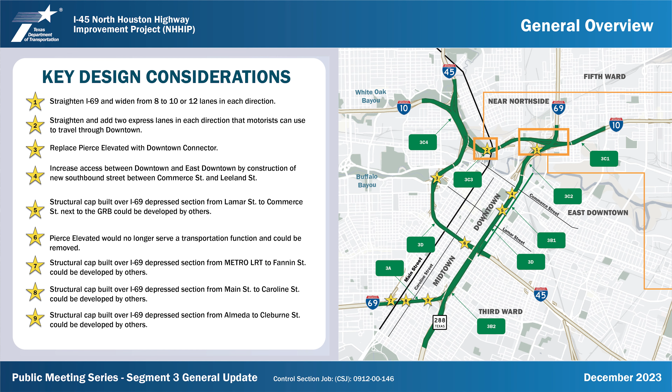So let's talk about construction, phasing, and the implementation, especially around downtown in segment 3. Project 3A begins at Spur 527 into SH 288. The elevated section today will now be taken and be depressed below ground. That project is slated to start in summer of 2026, and it's around a $600 million project.

Segment 3B1, so 3B has two components. 3B1 is first the drainage component of St. Emanuel along McIlhenny to Buffalo Bayou. That project is actually the first one that will be implemented, and we'll talk more about it in the segment 3B session. Segment 3B2 will be the interchange then with I-69, SH 288, and I-45. That project is slated to start in March of 2025.

Then we have the components of 3C1 through 3C4, which run along I-10. 3C1 beginning on the east side from Gregg Street to Waco Street. We hope to put that out into construction in 2027, and that is a reconstruction and widening of that existing facility. 3C2 will be the large interchange with I-69, I-45, I-10. We look to go out to a design build contract again in 2027 with that interchange.

3C3 will be from White Oak Bayou to McKee Street. That's the realignment of I-10 through and around the U of H downtown facility. And that project is about $250 million, and we believe we could accelerate that piece into summer 2026.

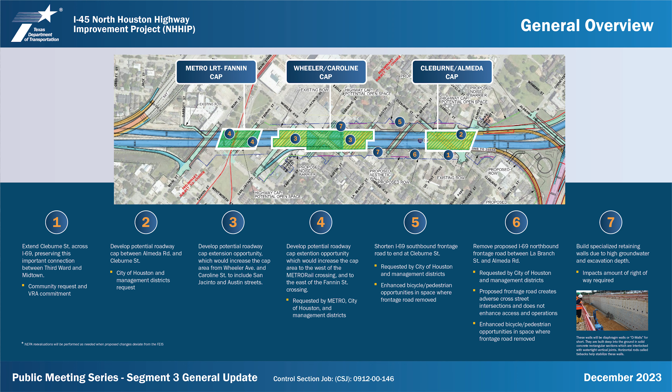And then the seventh design change in segment 3A relates to the specialized walls. We have a high groundwater table, and so as we go depressed, we actually have to use a unique retaining wall design that is a diaphragm type wall that's buried in the ground and sealed off then from the groundwater. This will be the first application in this area of this wall type, and as we get further in final design, there are potential areas of additional increased right-of-way.

I talked about working with Metro, so I want to go a little bit more into what we've been doing there at the Wheeler Transit Center. So with the facility change of the highway, instead of going over the transit, going under, we are now going to reconstruct the Wheeler Transit Center, and we're also going to add a third track to the components of the LRT, which helps us then keep those operations going during construction and better address the community's needs and lessen the impacts of the construction activities.

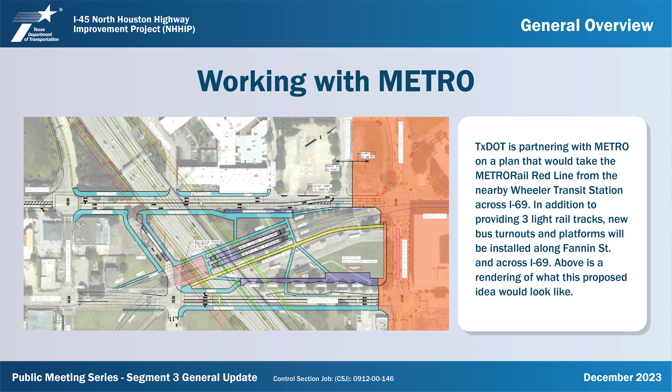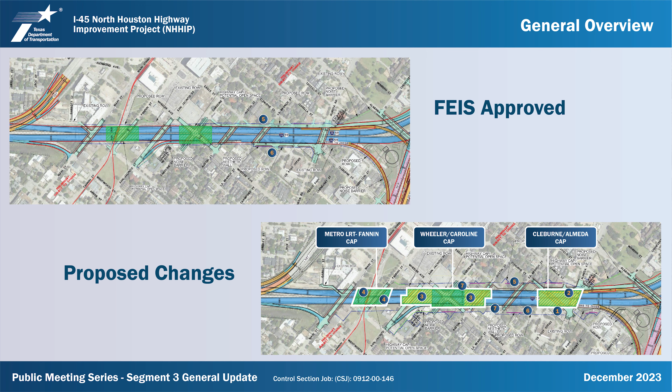So we've talked about caps. What is a cap? Segment 3A actually has 3 of the 5 potential caps in the NHHIP. And a cap basically is, as we go from elevated to now depressed, we not only connect the roadway that brings the community together from one side to the other, we have the opportunity to increase the concrete surface and space that gives us a larger area that can be repurposed for many different community needs. That's what we get into and call the art of the possible.

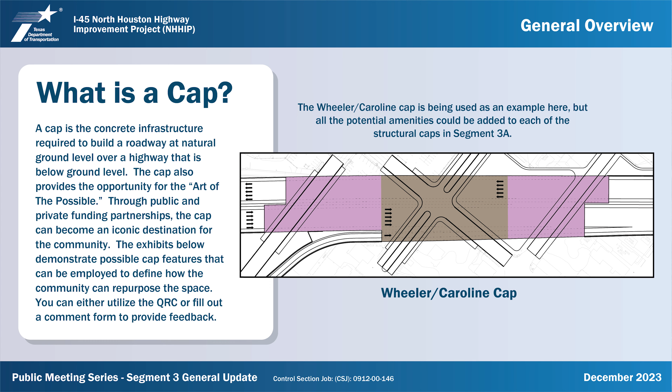So once these caps are in place, there's great opportunity then for what they could be, what we could put on top: places for children to play, places for you to recreate, places for you and your pets to get exercise, places to come and have theater and art events for the community.

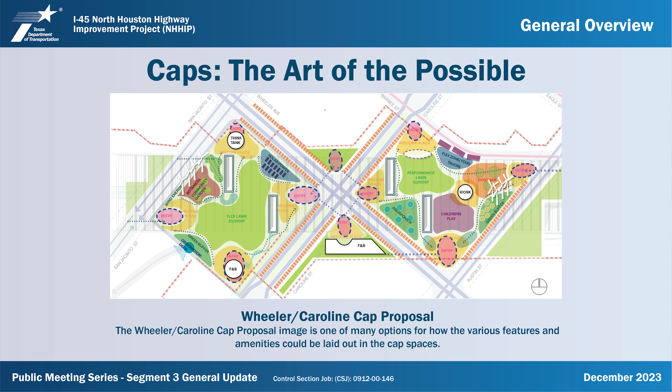So at this point, what we would like you to actually do is give us some feedback. As we work with the management districts and the city, we'd like you to take a survey. You can either put your mobile device over the QR code that's on the screen, or you can look on the taskbar of the Zoom to the Art of the Possible link, and then take this survey and give us some feedback.

Segment 3C3. Proposed design changes in the corridor along I-10 that we call Segment 3C, made up of 4 projects. Specifically, as you look to the west side, Segment 3C3 and 3C4. We have the work where we realign I-10, as we said, in the U of H downtown campus area. Working with U of H downtown, working with the city, we actually have some great opportunities to improve the design.

First and foremost, extending North San Jacinto Street up to meet Providence and Rothwell, which serve as frontage roads along I-10. So that increases that downtown access. The other thing is, between that point where we bring San Jacinto up, now taking Naylor Street, making it 2-way between San Jacinto, Main Street, and the access to the U of H downtown campus. That really helps us with the entire street grid network that'll be underneath the elevated freeways in that area.

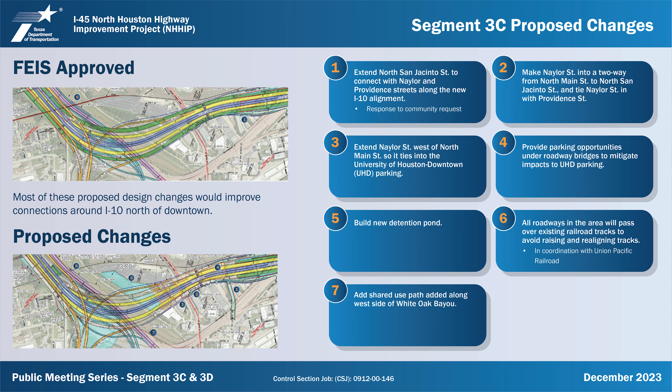Toward the east side of the project along I-10, the eighth design change that we've looked at specifically in response to stakeholders and feedback during the FEIS period was to add a Gregg Street exit. So from IH-10 now, we will be able to exit directly to Gregg Street. The ninth change on the other side of I-10 is to take the frontage road that previously stopped at Meadows and then picked back up at Jensen and make a continuous connection past I-69.

And then Nance Street in the FEIS was proposed to end as the interchange and the new Rothwell alignment came up to Jensen. As our 10th proposed design change, we're actually going to take Nance Street and extend it and connect it to Rothwell to again increase the flexibility and the connectivity between that area and Jensen and Rothwell.

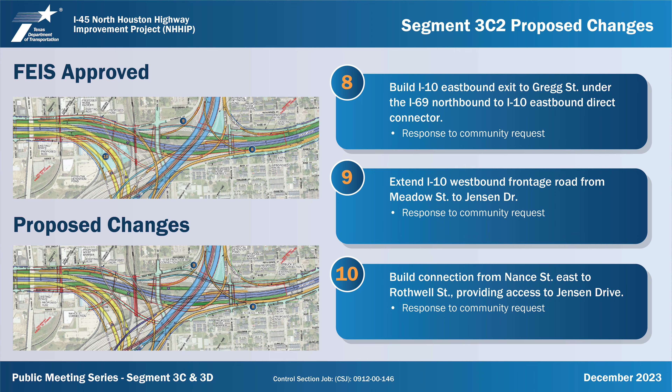And the other thing that we've looked specifically at, TxDOT has a commitment as they get into final design to look at reductions in the footprint where feasible. As we've looked at 3C and that area along I-10, specifically west of I-69, we've identified the opportunity along that piece of I-10 to reduce the right-of-way. We can reduce and eliminate the right-of-way in several parcels along I-10 west of I-69. That actually reduces the number of residences potentially relocated or impacted.

We've also identified some isolated areas along I-10 where we can similarly do reductions of right-of-way, or at the downtown connectors where realignment and connectivity into downtown enables us also to reduce right-of-way and potential impacts.

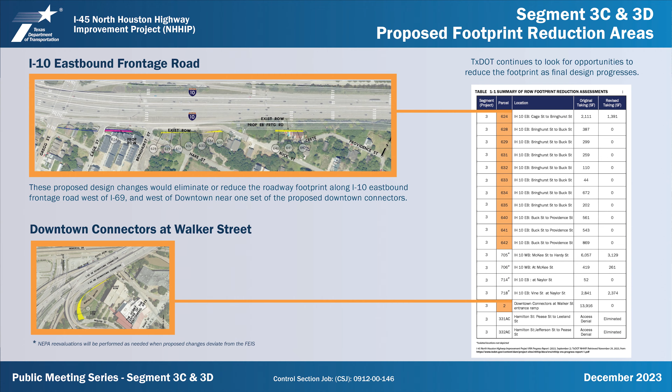And then 3D1, as I said before, 3D1 will actually be the piece where we depress I-69 and I-45 down behind the George R. Brown Convention Center, Minute Maid Park, and the soccer stadium. We give a real opportunity now for an entertainment space that connects all of those areas in the EaDo community and downtown community.

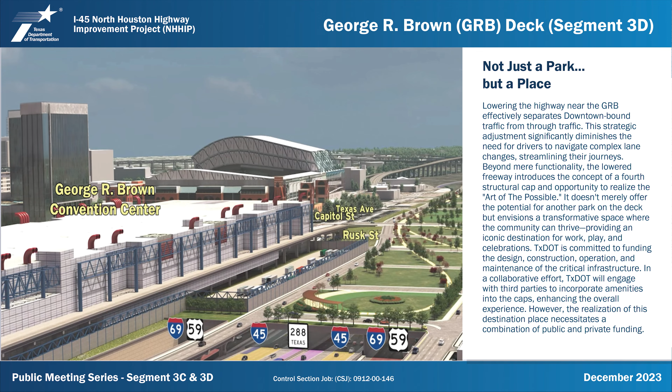As a part of all of these improvements, I want to talk about the drainage improvements. So with NHHIP now, we're going to be able to actually reduce the floodplain along Buffalo Bayou that goes through downtown. We're able to reduce structures that currently get flooded today, and we're also participating directly with our partners, Harris County Flood Control District, City of Houston, in the North Canal projects. TxDOT has put $20 million into the city's North Canal project, which is a bypass to reduce the flood levels along Buffalo Bayou. And then the South Canal component of that, TxDOT will construct as part of NHHIP in our Project 3C2.

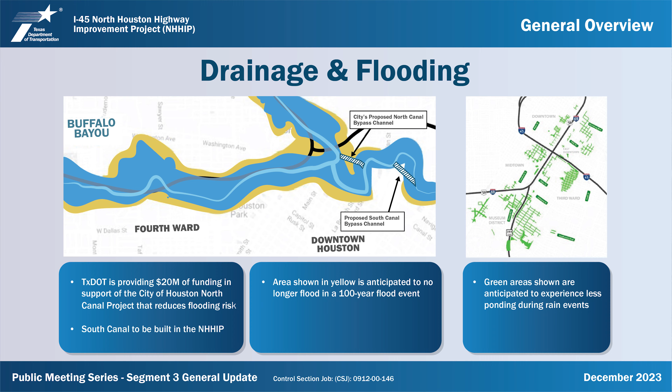Additionally, when we look along the depressed sections of I-69, as we go along St. Emanuel Street, as we go along Hamilton Street, we'll add capacity to improve the intake of stormwater flow. What that means is that water today that may sit on the highways or sit on the local streets or even in properties, more of that water will be taken and stored underground in large 12 by 12 storm sewer boxes that then over time can be released to the bayou.

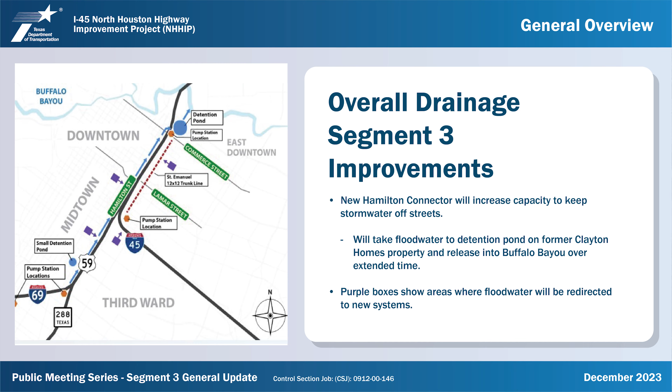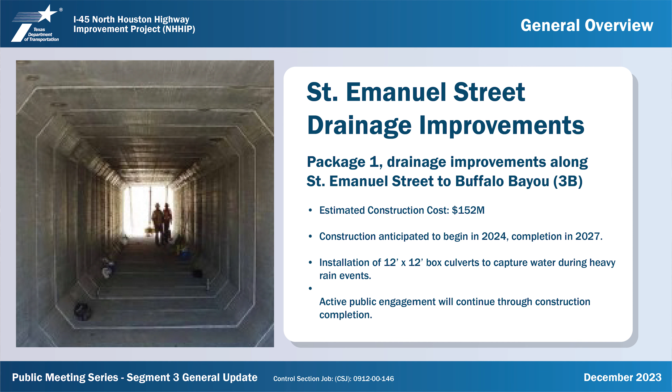The first project that we're going to do on 3B1 is actually a storm sewer improvement along St. Emanuel that puts that 12 by 12 box component in and reconstructs the roadway street. We will actively stay engaged with the public throughout that design and construction of that project.

Okay, I've given you a lot of information on segment 3 overall. We have staff available to respond to questions, and we want to give an opportunity for you to submit questions. We also ask you to stay tuned for the next session where we'll go into more detail in segment 3B, the first projects that are going to construction.